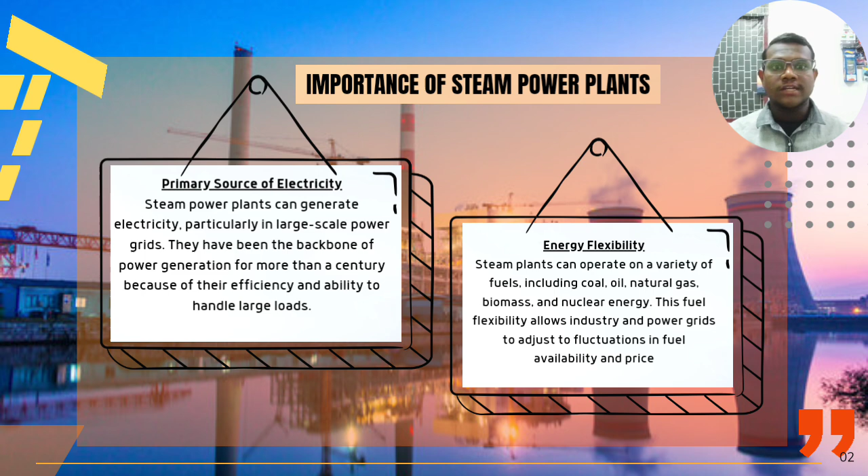Steam power plants can operate on a variety of fuels, including coal, oil, natural gases, biomass, and also nuclear energy. This flexibility allows industries and power grids to adjust to fluctuations in fuel availability and price.

Next is high efficiency. Modern steam power plants nowadays use a range of technologies such as supercritical and ultra-supercritical systems, which increase efficiency. For example, it reduces fuel consumption.

And lastly, reliability. Steam power plants use steam turbines, which increase reliability by working continuously for long periods of time.

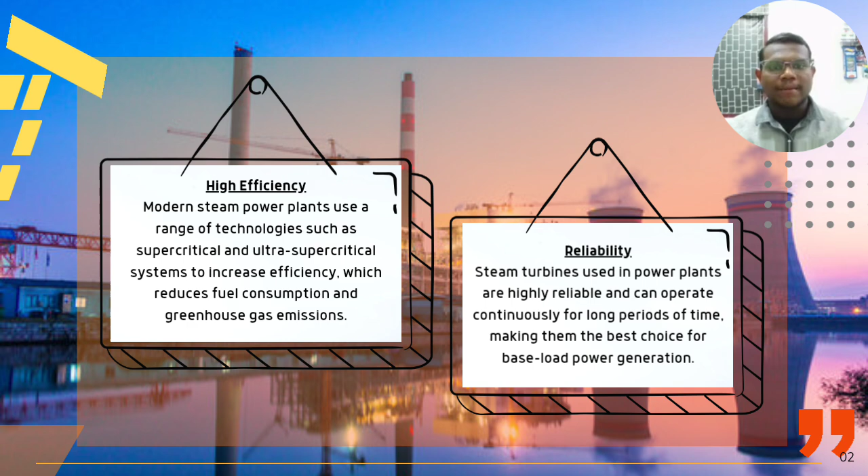Next, let's see the role of power plants in various industries. First is the manufacturing industry. It is commonly used in the textile industry, where it is used for dyeing, drying, and heating processes, ensuring the quality and texture of fabric are maintained.

Second is the oil and gas industry. It uses steam injection to enhance oil recovery, particularly in extracting heavy crude oil.

Thirdly, in the pharmaceutical industry, where it uses a lot of steam to sterilize raw materials, containers, and equipment, making it safer under sterile conditions.

And lastly, the mining industry. It is highly energy intensive, requiring a large amount of electricity for drilling, crushing, and mineral processing. So mining plays a huge role in the usage of steam turbines.

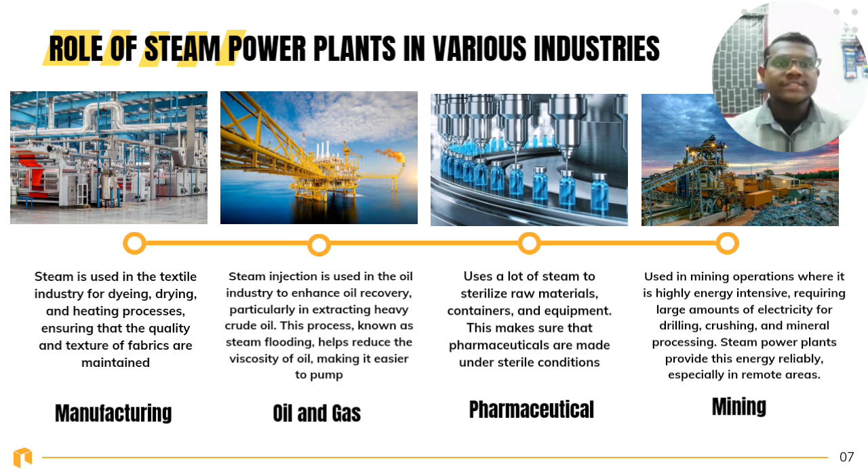Now we go to the differentiation of fire tube and water tube boilers. First, let's look at the design. In a fire tube boiler, hot gas moves through tubes surrounded by water. In a water tube boiler, water runs through tubes and hot gas surrounds them.

For application, fire tube boilers are good for low pressure use, while water tube boilers work better in high pressure situations. When it comes to cost, fire tube boilers have a lower initial cost, but water tube boilers are generally more expensive. In terms of efficiency, fire tube boilers are less efficient, while water tube boilers are more efficient.

The response to steam demands is another difference: fire tube boilers are slower, and water tube boilers respond faster. For maintenance, fire tube boilers are easier to maintain, while water tube boilers are a bit more complex. Lastly, in terms of safety, fire tube boilers are less suitable for high pressure applications, while water tube boilers are safer for high pressure situations.

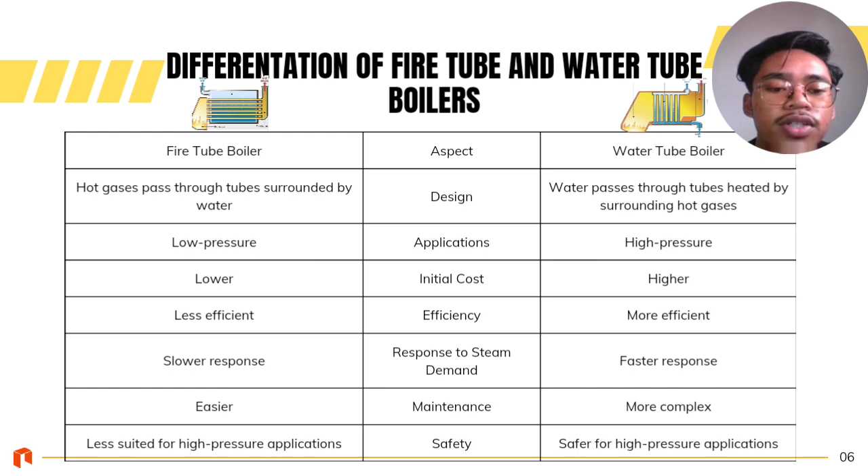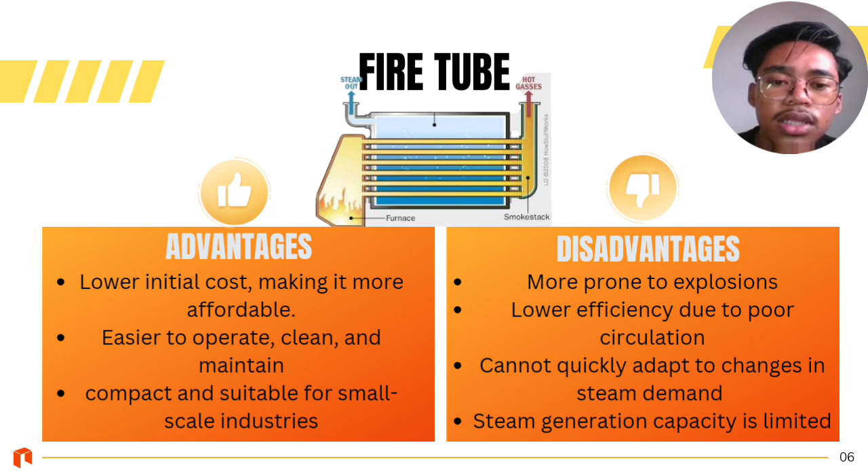Next, we go to the advantages and disadvantages of fire tube boilers. Advantages: lower initial cost, making it more affordable; easier to operate, clean, and maintain; compact and suitable for small scale industry. Disadvantages: more prone to explosion, lower efficiency due to poor circulation, cannot quickly adapt to changes in steam demand, and steam generation capacity is limited.

Next, advantages and disadvantages for water tube boilers. Advantages: higher efficiency, can operate at higher pressure due to smaller drum size, respond more quickly to changes in steam demand, and less prone to explosion.

Disadvantage: higher maintenance costs, requires careful attention to feed water supply, more susceptible to overheating if water supply fails, and less suitable for impure water.

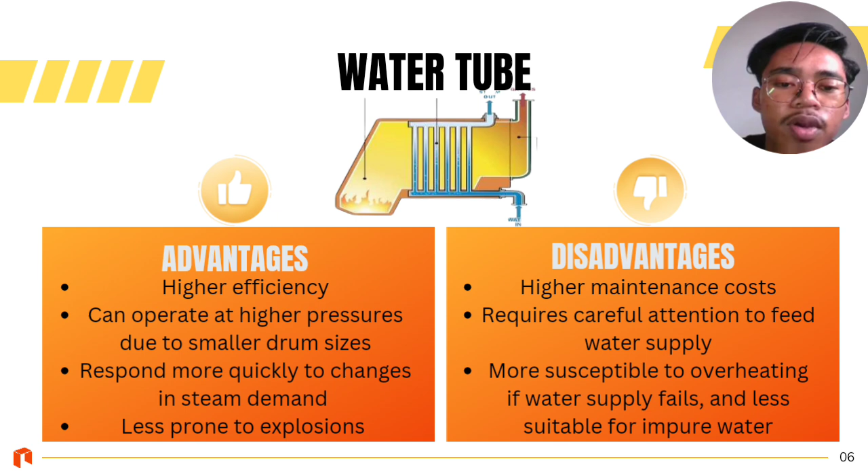Next, we go to heat saving instruments. One, the economizer: its function is to recover heat from exhaust gas to preheat boiler feed water. For efficiency, less fuel is needed to turn preheated water into steam, boosting efficiency.

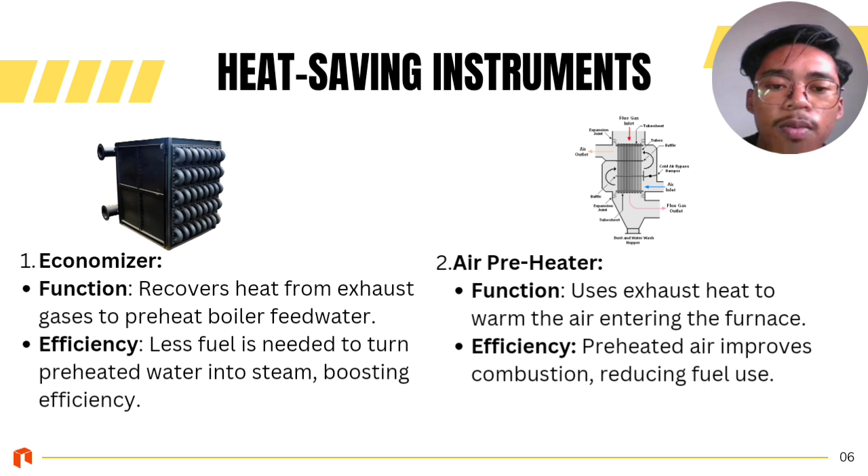Number two, air preheater: its function is to use exhaust heat to warm the air entering the furnace. For efficiency, preheating improves combustion, reducing fuel use.

Number three, superheater: its function is to raise steam temperature beyond its saturation point. For efficiency, it produces dry steam, increasing turbine efficiency and preventing equipment damage.

Lastly, feed water heater: its function is to preheat water using steam from the turbine. For efficiency, preheated water requires less fuel to turn into steam, improving efficiency.

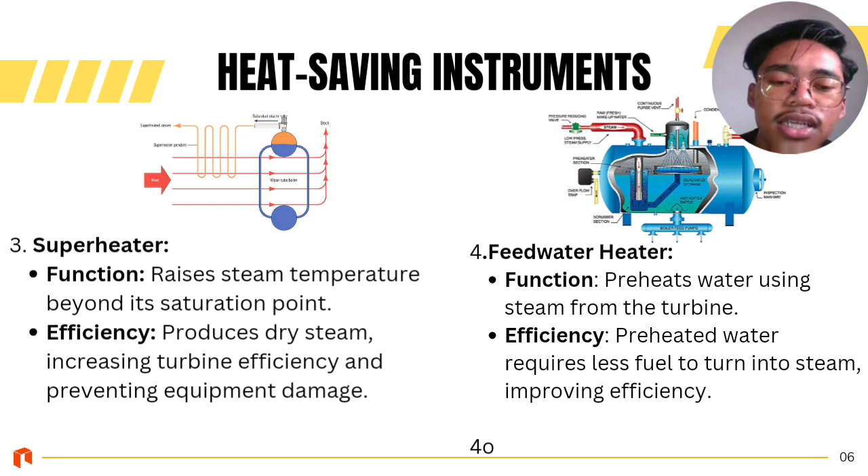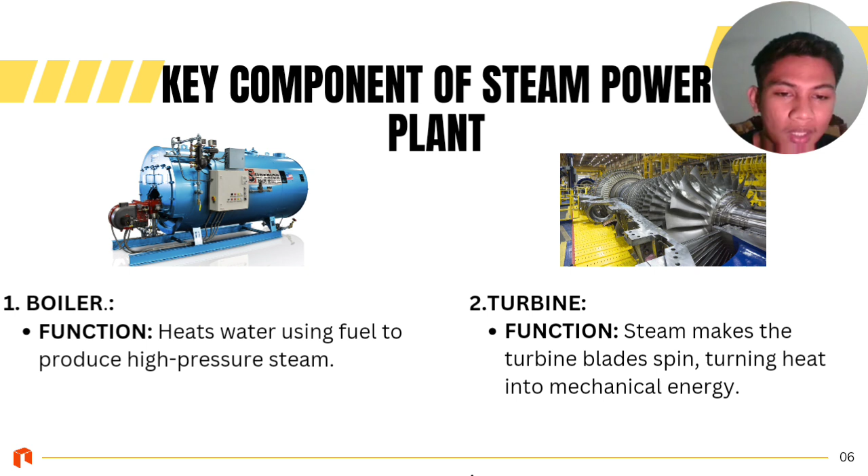Number three is the condenser. Its function is to cool and convert the steam back into water.

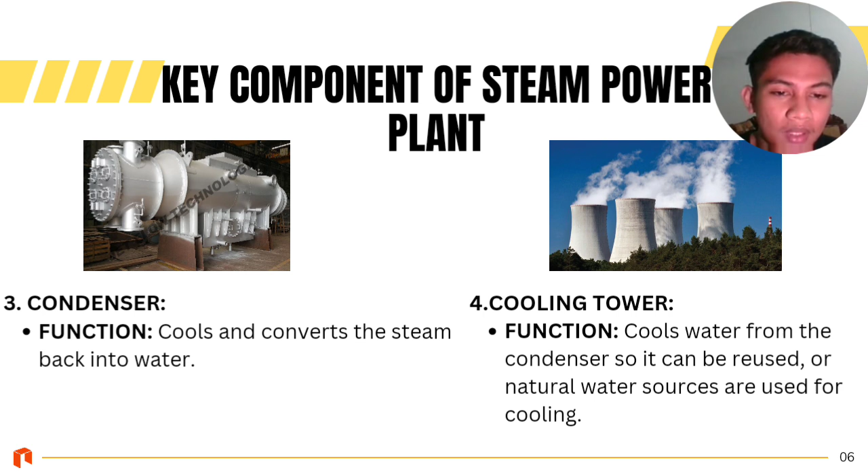Number four, cooling tower. Its function is to cool water from the condenser so it can be reused, or a natural water source is used for cooling. Number five is the pump.

Its function is to move the condensed water back to the boiler for reheating. Number six is the generator, whose function is to turn the turbine's mechanical energy into electricity.

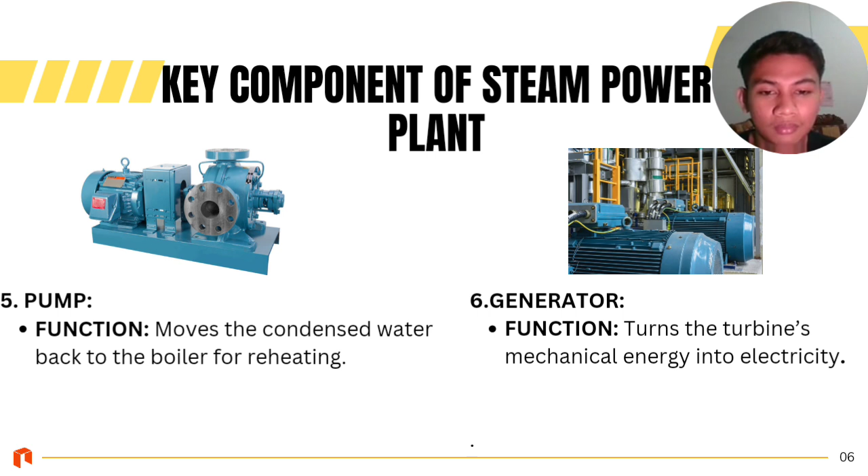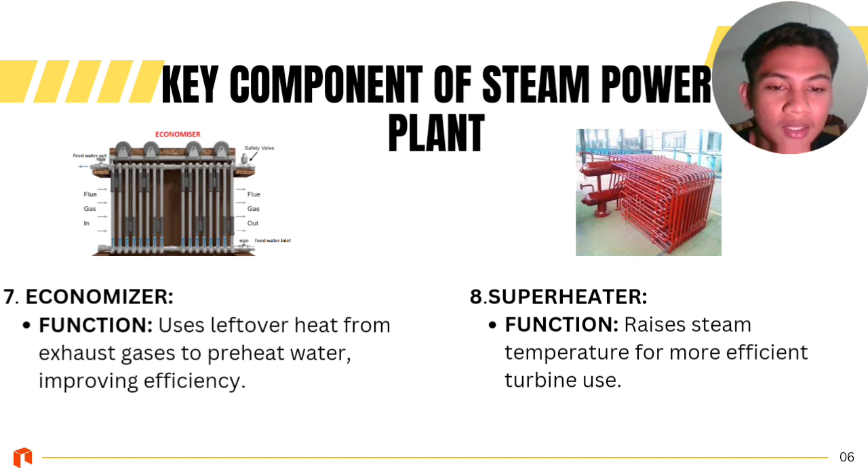Number seven is the economizer. Its function is to use leftover heat from exhaust gases to preheat water, improving efficiency. Number eight, superheater, whose function is to raise steam temperature for more efficient turbine use.

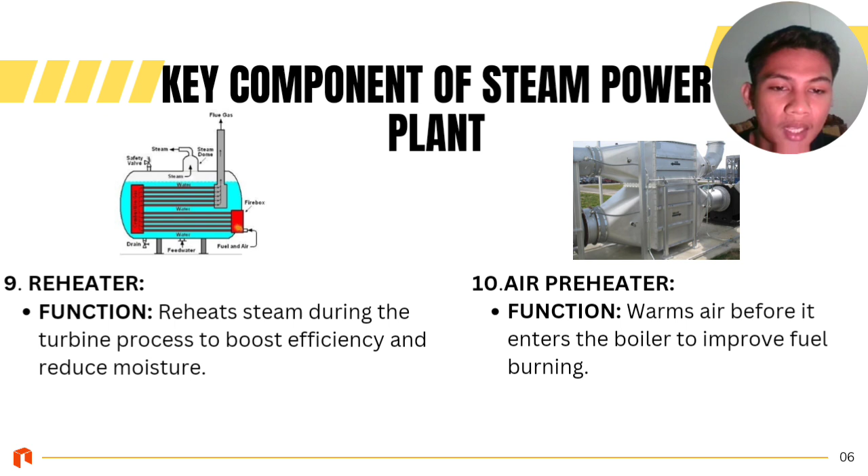Number nine, reheater. Its function is to reheat steam during the turbine process to boost efficiency and reduce moisture. Lastly, air preheater, whose function is to warm air before it enters the boiler to improve fuel burning.

Next, I will talk about safety inspection in boiler tubes and drums. The significance of safety inspection is, first, to prevent failures. Boiler tube and drum failures can lead to catastrophic accidents such as explosions, which threaten both plant personnel and equipment.

Second is to improve energy efficiency. Regular inspections help identify issues like corrosion, scaling, and material fatigue, which can reduce heat transfer efficiency and increase fuel consumption. Third is prolonging equipment life. Regular inspection helps identify early signs of wear and tear, allowing maintenance to extend the lifespan of boiler components.

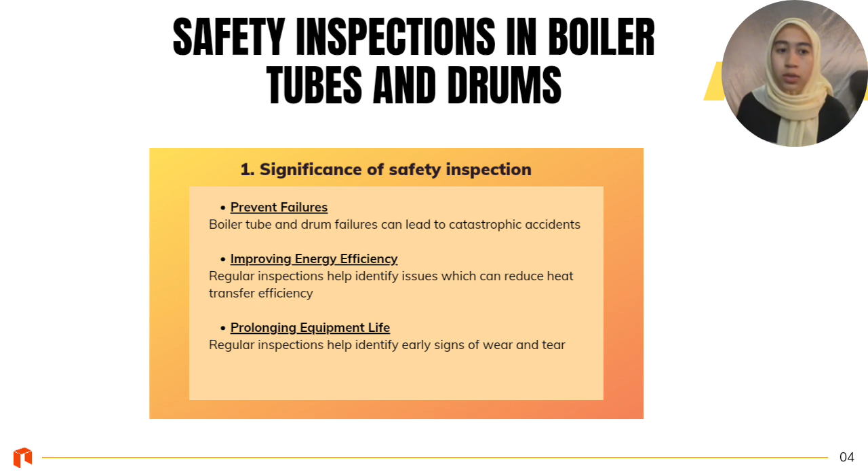Next are common issues to consider. The first is corrosion. The internal surfaces of boiler tubes and drums are prone to corrosion due to exposure to water and steam, especially if water chemistry is poorly controlled.

Second is scaling and fouling. Mineral deposits from untreated water can form scales on the tube surface, reducing heat transfer efficiency and leading to overheating.

The third is cracking. Thermal stresses can cause cracks, particularly in weld joints and tube walls. These cracks, if unnoticed, can lead to tube bursts.

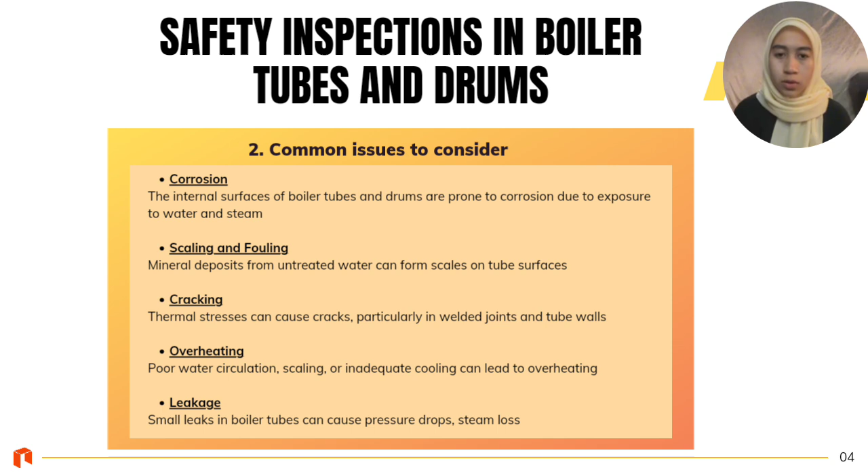Next is overheating. Poor water circulation, scaling, or inadequate cooling can lead to overheating of tubes, causing them to deform and rupture. Last but not least is leakage. Small leaks in boiler tubes can cause pressure drops, steam loss, and eventual failure if not detected early.

Now I'm going to explain the regulation and safety procedures in a steam power plant. For regulations, there are four: first, occupational health and safety standards; second, pressure vessel and boiler regulation; third, environmental regulation; fourth, fire and explosion prevention.

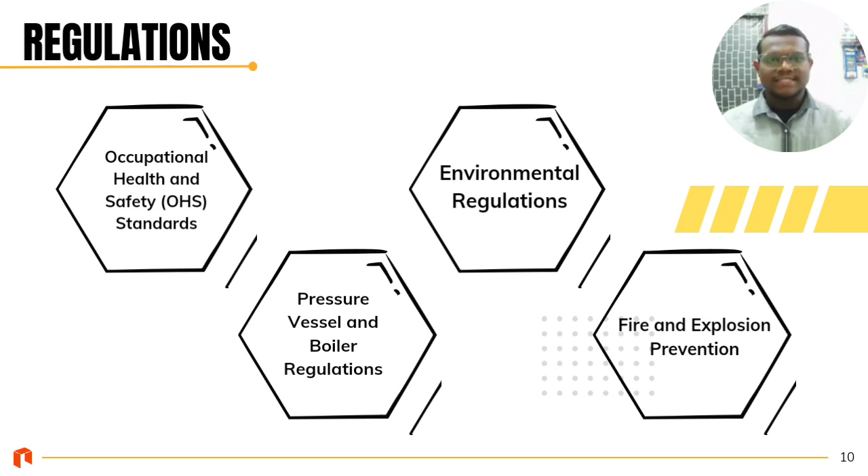Next, let's see the safety procedures in a steam power plant. First, boiler safety, which includes the maintenance and inspection of the boiler.

Second is steam safety, which includes the temperature and pressure monitoring system. Third is personal protective equipment (PPE), which includes the PPE needed for workers in the steam power plant.

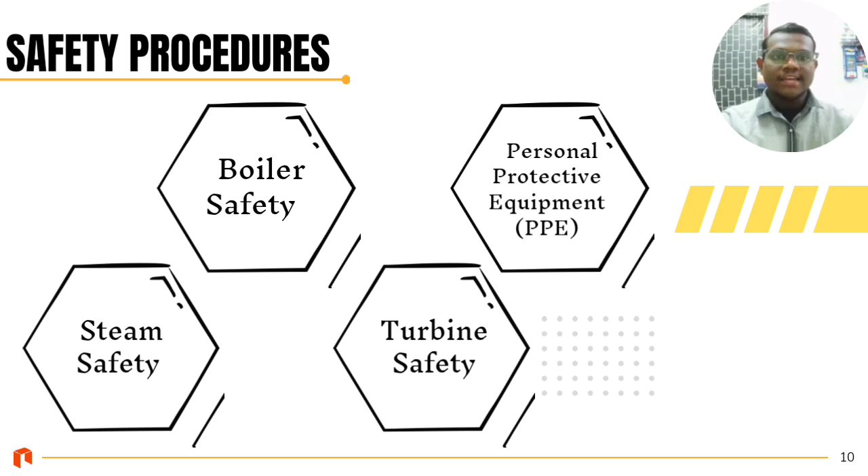Lastly, turbine safety, which includes the inspection of the turbine. So that's all. Thank you.